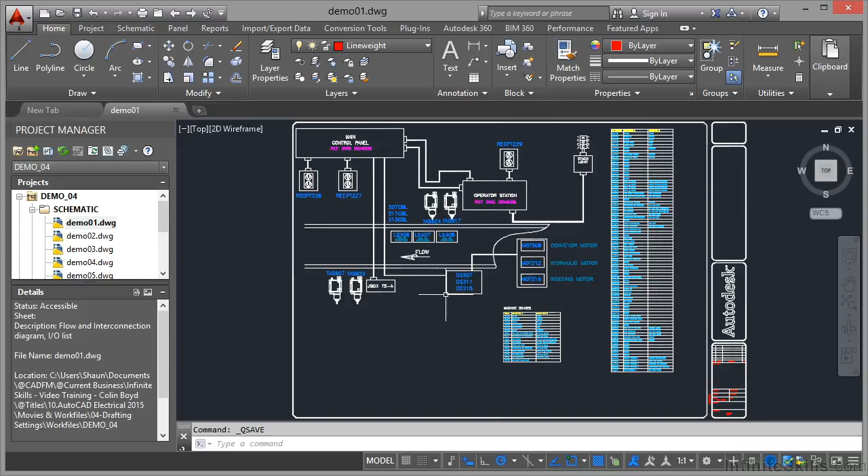So I'm going to zoom in on this little central panel here. And you can see there's some text there, but also there's a rectangle here going around the text. It's a polyline. And if I hover over that, it gives me some information about the polyline, telling me it's on layer 0. I can't edit that information about the properties though until I click on it, and then I right click like that, and I bring up the shortcut menu.

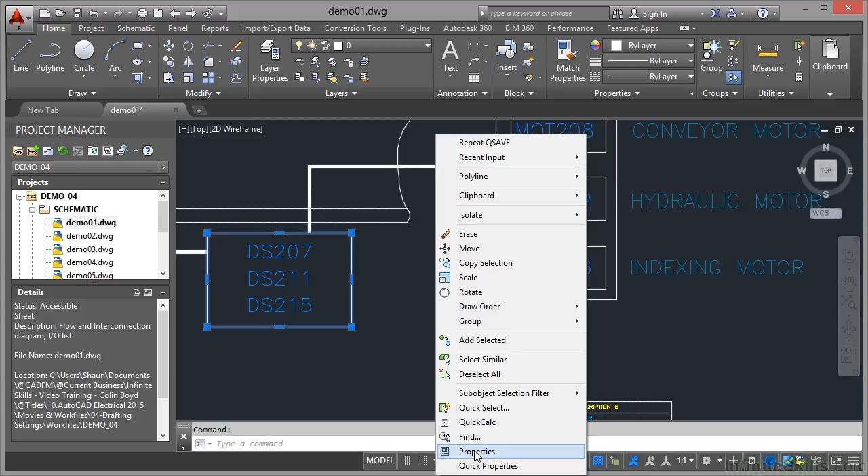Now right down at the bottom of that shortcut menu is Properties, so I click there, and that'll bring up the Properties palette. That's obviously obscuring the rectangle, so I'll just click and drag on the title bar like so. So you can see there, it's telling me it's on layer 0. So if I click there, click on the flyout menu, and if I come down now, there's that line weight layer that I set up.

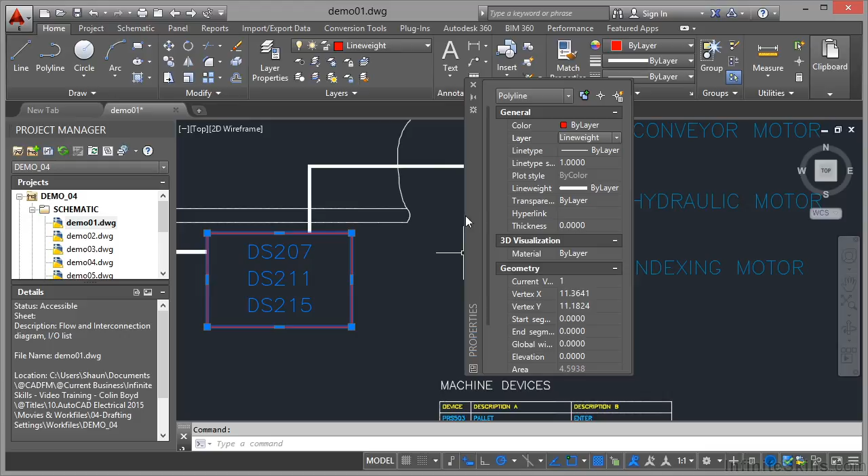Click there, and now I close the Properties palette, and then I just hit Escape. And as you can see there, that has obviously changed the properties of that rectangle. What I need to think about is there a way where I can do that quicker? And yes, there is. I can switch on Quick Properties, sometimes known as QP. Down here, again on the status bar, Drafting Settings, it's this icon here. I switch on Quick Properties or QP mode there.

What happens now is when I click on that particular rectangle, I get the Quick Properties like so. I don't have to right click, go to Properties on the shortcut menu, and it just gives me a number of settings. It tells me it's a polyline, on layer, line weight, and so on. Now I can actually change the settings of my Quick Properties by way of changing what is displayed. Let me just hit Escape a couple of times just to deselect that.

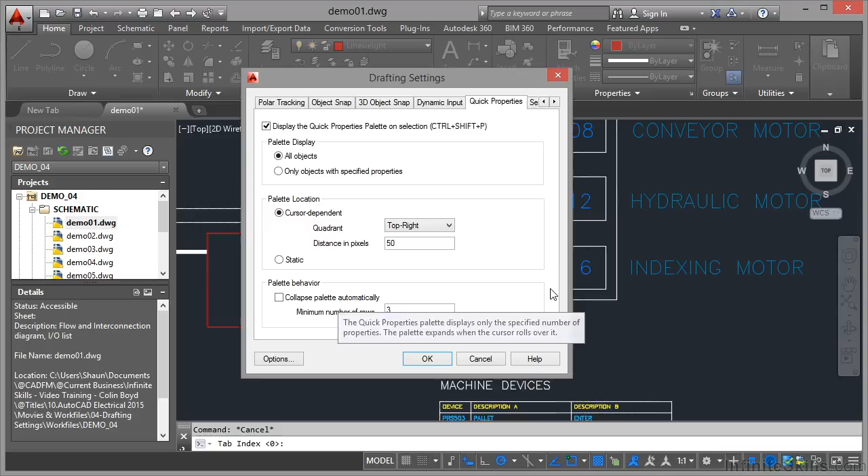Quick Properties is down here. I right click and go to Quick Property Settings, and I can change the settings of my Quick Properties. Again, it's in the Drafting Settings dialog box, Quick Properties tab. So that displays the Quick Properties palette on selection. All objects. I can change whether it's cursor dependent, whether it appears top right, top left, distance away from the object in pixels, and I can also collapse the palette automatically with a minimum number of rows there. I'm not going to change any of those settings, but if you wanted to, you could.

So with Quick Properties on now, I click, change the layer very quickly. I want that going back to layer 0. I then hit Escape twice, job done. Now the reason I hit Escape twice is to cancel any command and then also cancel any object selection. So get into that double escape key press. It works well, and it cancels the command first, and then any object selected. So that's how your Quick Properties, or QP, works in AutoCAD Electrical.